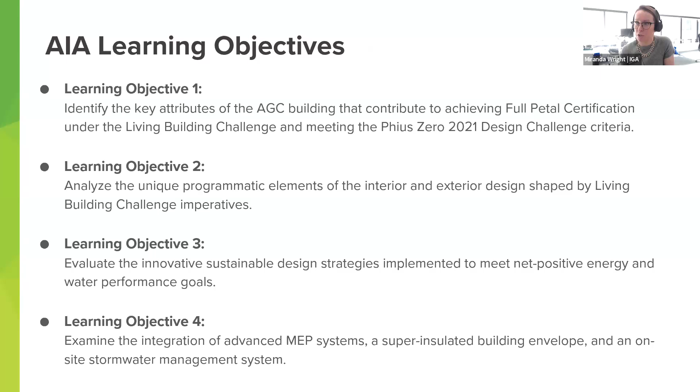And now on to the main event. We have a great lineup of the project team for today's program, starting with Angel Valtierra, an associate at SMNGA Ltd. He was the project manager and project architect for AGC. He handled the day-to-day coordination while overseeing the construction documents and administration for the project.

Next is Todd Niemiec, a principal for SMNG. Todd served as project architect and team lead for AGC with a focus on building programming, planning, code, and zoning compliance responsibilities. Then we have Len Sciarra, principal for FARR Associates. Len served as associate architect leading sustainability activities and detailing of the exterior building envelope.

And last but not least is Sachin Anand, principal with DBHMS. Sachin served as the lead building systems engineer for AGC with a focus on building performance modeling, system design, and thermal comfort design. Now I'm going to pass it over to our speakers to get started.

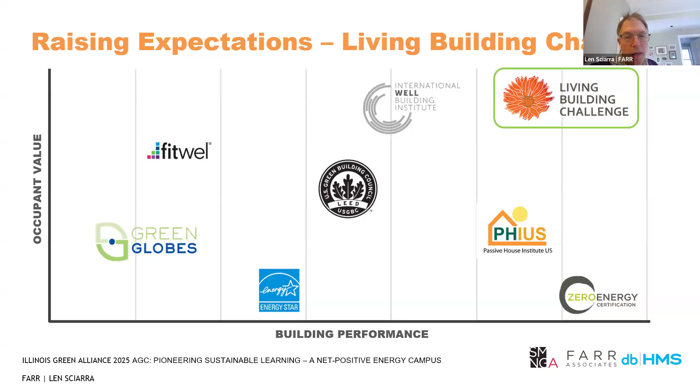And we're like, can we do it? We're like, well, we think we can. And we had the land, so that made it a little easier. And there was some ComEd community grant to help with some of the PVs on that. So kind of all the pieces fell together. And we put a stake in the ground and said living building. And we're well on our way. We have submitted, so we'll see on that. Next slide.

All right. So Todd talked a lot about community engagement and front end work and the Cultivate Collective Academy for Global Citizenship. They've got a lot of partners. It's a very complicated capital stack. So Aaron Carbonari helped put that together. There was a lot of community engagement on the front end that helped because as part of living building, there's a whole chunk of equity and inclusion that you need to document and you need to engage in the process. And so luckily, at AGC that was all what they do. They're into it. And so it was sort of easy to go through all that.

On the construction side, it was a typical design bid build. Todd's team had the construction of the building, but then there was a kitchen consultant and furniture consultants and permits and graphics was a different group of people. So there was a lot of other people. So as the sustainability integrator, we had to get information from all these people. And then of course, power and the subcontractors. So there's just a lot of people involved and there was a lot of information flowing back and forth.

And I think part of this presentation is about what we would have done differently. We would have had a way better collaborative portal for information, because there's so much information that has to flow back and forth between so many people. And we were doing it via email, which is fine, but having a more comprehensive collaborative portal where we could have exchanged information would have been super helpful. Next slide. I think it's worth mentioning that this was built during the pandemic.

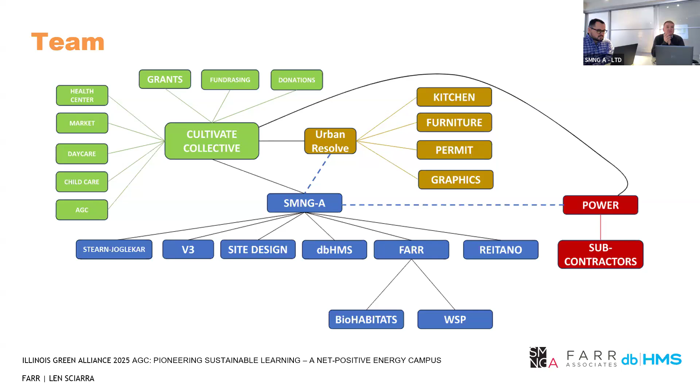So we did have challenges with being in person and communication, but also with construction and long lead items and supply chain disruptions. So it was very critical at the very beginning to have everybody at the table, not bring people on as we went. We needed the benefit of everybody's perspective on things, including the contractor. So the contract here was pre-construction services leading to a GMP, and all the subs were bid out competitively. So it was a qualifications-based selection at the front end. If we didn't have the GC at the front, it would not have made this easy, or I'm not sure if it would have worked at all. Right. Yeah, good point. Next slide.

All right, so Todd alluded a little bit to the site, or Angel, do you want to talk about the site? Yeah, for the site, as Todd mentioned, it's in Chicago, Illinois, on the southwest side near Midway. So we're just north of Midway, in the flight path, surrounded by residential. As mentioned, it was the former LeClaire Courts residences, but those were all torn down in the 2000s, and the site had remained vacant. We're not going to go through every petal and every imperative, as there's 7 petals, 20 imperatives, but we just want to highlight a few things about the Place petal.

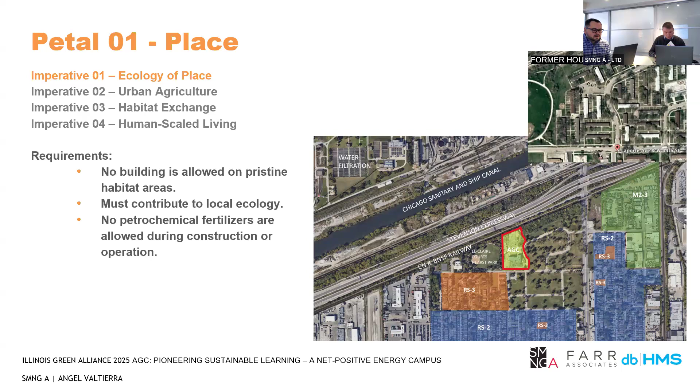As Len mentioned, we do need an open site to be able to house a few things that support the program and the Living Building Challenge in terms of supporting its users and making a better environment for everybody. So zooming in on the site itself, it automatically lends itself to the Place petal because it's not a greenfield site. So we're kind of rejuvenating the site with an urban farm that can support the school and the community. We have the PV to the right side of the page. We couldn't fit all of the PV on the roof, so we had the land and the space to put the PV. As we're going clockwise, the training hub environmental center, that's part of phase 2 programming.

And then just south of that, there's the community plaza next to the community hall. As Todd mentioned, the Esperanza Health Center is on the southwest corner, or bottom left corner for everybody. And then, other programming needs, we have covered bike parking, which is unique to the project, but that also lent us another surface for the PV.

So as Todd mentioned, the curriculum requires them to be outside 30% of the day. So that lent a helpful hand in terms of meeting the other imperatives, like habitat exchange. They're doing a lot of community service outside of their site. They're giving back to the earth. And then human scale, we're not imposing on any other surrounding sites. So that helped us as well. So location was a key factor for achieving this petal.

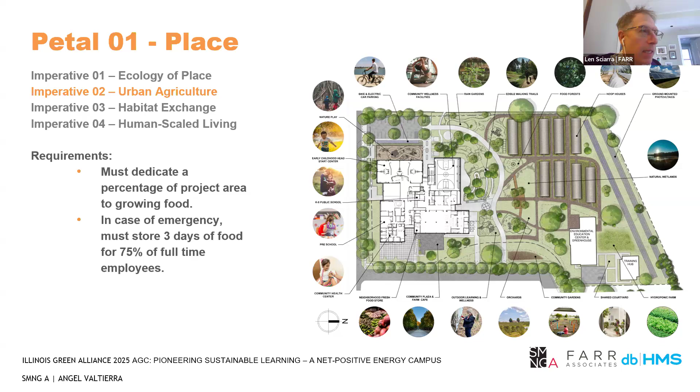So Sachin, I'm not going to steal your thunder. Okay. Oh, wasn't there another place petal? Okay, well, we're going into water now. No, I skipped those ones. Got it. All right, cool. So Len, you want to team up with me on this water petal so we can talk through this real quick? Yeah. Love it, because that little Department of Buildings is mine.

Yes, it is. And really, what we want to talk about here, and you heard Len mention it earlier, is some of the lessons learned. What went better than expected, and what was a challenge. We're not trying to walk you through how to design an LBC building. A lot of folks listening today probably already know that. We're trying to share our lessons learned, and on the water side, as you know, we need to be at net positive water, and we went through an entire process, and Len really spearheaded that. So I'll let him chime in here, in terms of working that through with the Department of Buildings.

So obviously the first stumbling block is that they won't let us use the water for drinking. And they were even really nervous about the toilets. I'm sure everyone has heard the story about, oh, what if they drink water out of the toilets? You got way bigger issues if you're drinking out of the toilets. But we got through that, and we got through who's going to inspect the system, because it's kind of a state thing versus a city thing, and they were all hands off. But eventually we got everyone together. This was also during the pandemic, so we couldn't meet with anybody, and it was brutal getting a hold of anybody in the city.

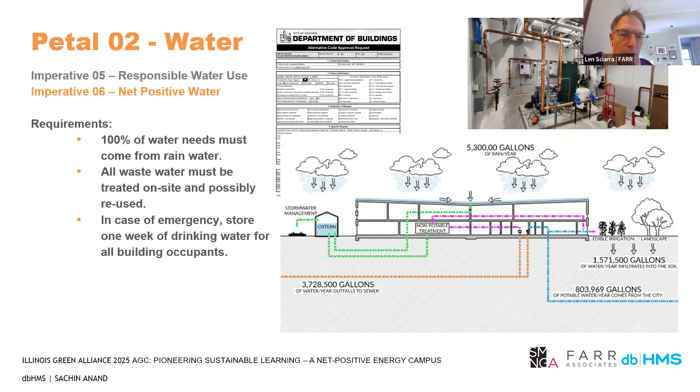And then here's just a schematic. The one thing I would mention here, just in passing, is that if you haven't done a rainwater harvesting or a stormwater harvesting system, it's not very complicated. It looks complicated on this. We've done it several times on projects, and these days you have folks who will provide you a skid-mounted system. Don't try to reinvent the wheel. Talk with one of those providers. They will work with you.

And like Len said, the key is how it integrates with the plumbing and the controls and the electrical and the energy piece of it. I think that's the place where you need to pay attention, rather than the inner workings of this system. That would be my advice to folks who want to incorporate a rainwater harvesting system on their project. And no standing water.

You've got to be recirculating your water. So with the day tank, you've got to be recirculating the water. The cistern, you've got to be agitating the water. The city really doesn't like water just sitting around. It's always got to be moving. So there's a lot of, oh yeah, we need another pump to circulate the water, and a float switch to tell when we need to circulate. Yeah, that's the lesson here. Circulate the water. Next.

I think one thing too, and maybe you can speak more, is the advocating to the state, how we had to go to the state level for this to get passed. Well, again, this is a city. The city was like, rainwater, that is not our gig. They don't want to touch this. The City of Chicago doesn't want to touch rainwater. They're perfectly happy to push it off to the state.

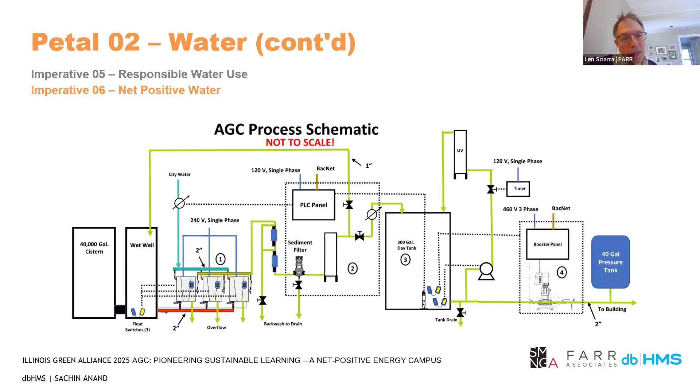And of course, there's one guy in the state. But I have a cell phone number. So eventually we got them together, and the city was happy. The state was happy, and we're flushing the toilets. Just don't drink the water from the toilets.

The other big piece about the water, at least in the living building, is that because we have a combined sewer overflow, we were able to use the fact that we have a superior stormwater management system to reduce our release into the combined sewer. So within this context of a living building in Chicago with a combined sewer, we were able to combine the stormwater and the potable water, because the ultimate outflow of the system is the combined sewer.

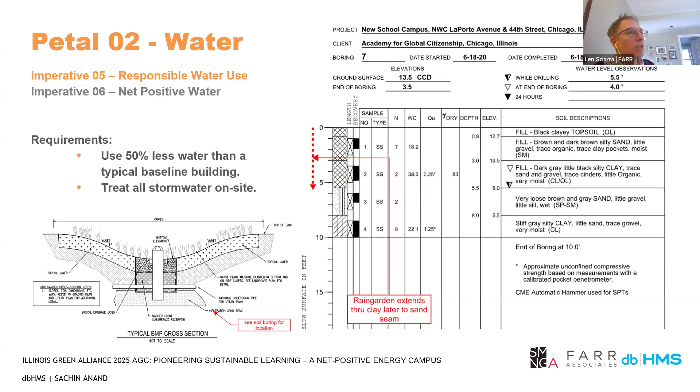And we were very fortunate. One, we had a lot of land, and two, we had a really nice sand seam. So once we punched into the sand seam, we were able to absorb 100% of all the stormwater. It was a lucky accident, and it allowed us to make the net zero water thing go, because we are releasing water into the sewer. We don't have a black water system. There are some exceptions there. So it's net zero water, but it's net zero water when you count the stormwater.

But it's really about keeping an eye on this. Like Len said a few minutes ago, we didn't consider the freeze protection heater for the stormwater cistern, and we had to add that back later towards the end when we discovered that. Those are all things which can trip you up, and it's really important to have that communication with the team.

The other thing, which is a lesson learned and also important for these projects, is that you have to pay attention when you're getting submittals for equipment which uses energy, because very often the system may perform, it may move the same amount of air, but it may be of a different horsepower. So the devil lies in the details, and you're constantly adjusting your energy model and updating it with the changes, not just during the design process but also during construction, to respond to certain things.

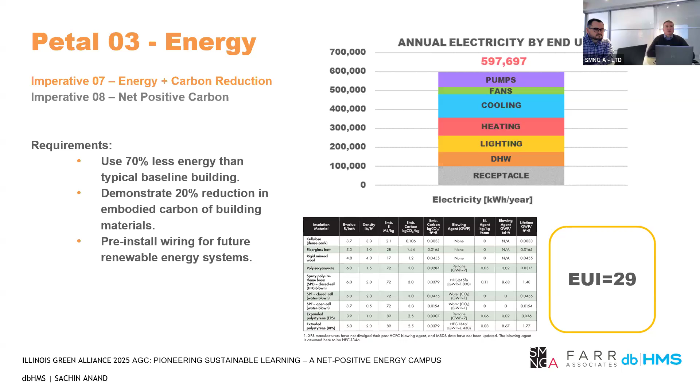So we'll switch to the next slide and start talking about some of those things here. Sachin, I thought I'd just mention also that a lot of this modeling required us to really understand how the user was going to use the building, the hours of use, the intensity of use, and really get everybody on the same page. I know that there are systems that are bigger than plug loads, but it's really important to get a meeting of the minds on how the building's going to be used so that we accommodate those loads and that energy use accordingly.

Correct. Excellent point, Todd. And the other thing is, we had meetings with the users, but also once the building was built, we went back and had meetings with groups of faculty to educate them. Very often, what do we do in our industry? As designers, we design, the constructors build the building, we do some commissioning, and that's great. But then we turn over the keys to the users, walk away, and hope that the building's going to perform. If you really want to have a sustainable building, you have to maintain that engagement.

So moving on here, the most important piece of the energy efficiency for this building is really its building envelope. Now we've gone through two really cold winters, and we know how the building performs. Last year, when we had the really cold spell with almost single-digit temperatures, the building lost power for 48 hours because ComEd's transformer had a problem, and the temperature never dropped below the low 60s in the building. So that tells you a lot about what a really good building envelope can do, and it is key to maintaining the energy efficiency. Then supporting that building envelope are some of the systems we have.

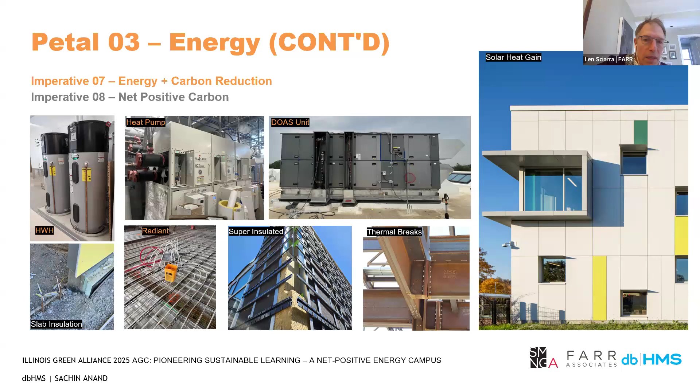And I think insulation wise, Power did a great job. I mean, Steve Black, and he was on it. And next slide. We had a very robust air barrier. It could take a lot of abuse. I have some pictures of this stuff banged up and they could seal it.

So we're pretty good. We probably could have spent a little bit more time analyzing the wall R value, and maybe we went a little bit overboard, but we weren't sure because we knew we had to hit 0. So we have a pretty involved 8 inches of insulation, which involved the Cascadia clip and then another piece of metal. And if we had maybe gone to 6 inches, we could have just used the Cascadia clip and saved us a little bit of stress. But they needed it for the subframing to get it all square.

The other piece on this, on the energy petal, just so you know, that's where LBC puts all the embodied carbon. So in addition to all this, we did an embodied carbon study against the baseline. There are some offsets to offset the embodied carbon, and that was pretty straightforward. But the data for embodied carbon is all over the place. We used a little bit of Athena, we used a little bit of the people from Washington Carbon Leadership Forum.

So we kind of mushed it together. It's kind of like LEED. You just sort of do what you can because the information is not 100% there. But we didn't use anything like Tally where we sort of took the building. It was a very manual process of looking at the elevations, doing square footage takeoffs, and I've never met a spreadsheet that I didn't love. So it worked out spreadsheet wise.

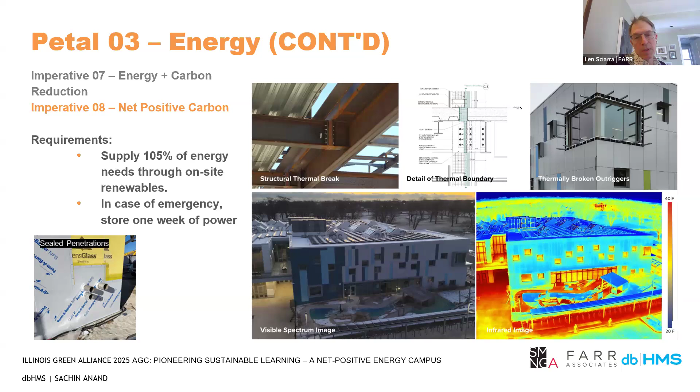And then the ventilation is decoupled from the heating and cooling. So what that does is that makes the ductwork smaller, and we use the water to deliver heating and cooling into the space, which is more efficient. And the other thing I want to point out is the building is all electric, no fossil fuels, and we do not have any backup electric or any other kind of backup for the geothermal. So we're 100% heating and cooling on the geothermal.

So on a day like today, if that parking lot warms up because the sun's hitting it, that water in those tubes could be 70, 80 degrees, and we could inject that into the geothermal loop, which would improve the efficiency of the heat pump. So that's kind of part of it. The other thing the building has is a PV system, which is north of 0.5 megawatt. Part of it is ground mounted, part of it is roof mounted, and then we have a battery energy storage system.

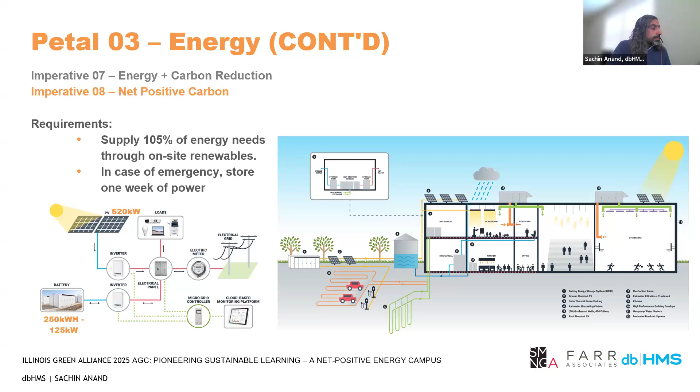Okay, so now we jump into the interiors, and a couple lessons here are daylighting is really hard, and views are really hard to balance with the envelope, right? As Todd knows, the original building was a long, skinny building, tons of daylight, tons of surface area, and it wasn't going to meet our energy goal. If you notice, it's a very compact shape, yet deep floor plates.

The materials, pretty straightforward. CDPH, tons of materials available, not that difficult for people to comply with. Just have it in your specs. And then AGC is very involved, so we had an operations plan, green cleaning chemicals, pretty straightforward stuff. Next slide. Len, I want to go back and talk a little bit about the daylighting.

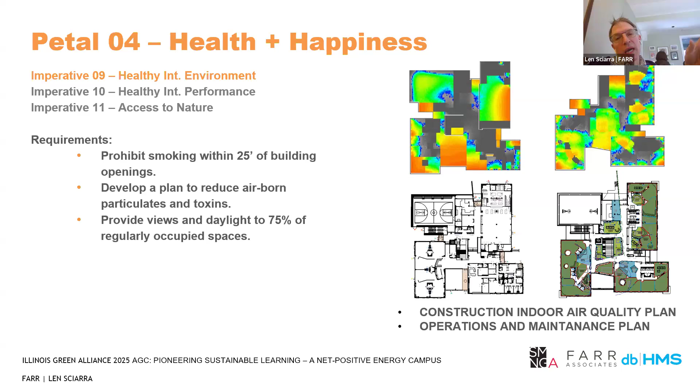So the window to wall ratios are measured and placed appropriately based on the modeling and the architectural design, and that's really key to it. This notion that you have to have 50 or 70% window to wall ratio to make the building open and have good daylight is not necessarily true. Right. There is a lot of transparency, and we have some more photos of the inside looking out in the next 2 slides.

So the other piece to Living Building is to have sort of a monitoring system or testing. And very early on, we said, no, there's no way we can test the building, because guaranteed, once the people use it, all the formaldehyde levels and the VOCs are going to just go up because of all the clothing and the perfume. So we decided to put in a RESET system. However, we didn't hire the RESET person early enough, and we have to add some sensors.

So if you're doing a RESET system, you've got to get them super early, because there's all these parameters about how big a room can be versus the sensor. So basically it's just number of sensors. And we came up short because we didn't engage those guys. Like the battery guy, we didn't engage, in this case it's the girl, but we didn't engage the RESET person early enough. And we're chasing our tail on that. So get people involved early, because this is really complicated.

But other than that, the sensors we do have are measuring, they're working, they're integrated with the building management system. And sometimes it's providing too much information. So Paul's like, whoa, what's going on? And it's a school, right? It does exactly what you would expect. In the morning, the VOCs go way up, right? And then the ventilation system starts filtering and things drop down. So it's doing exactly what it should. Next slide.

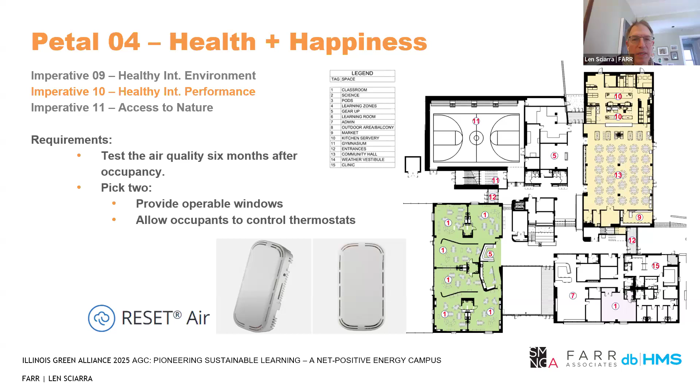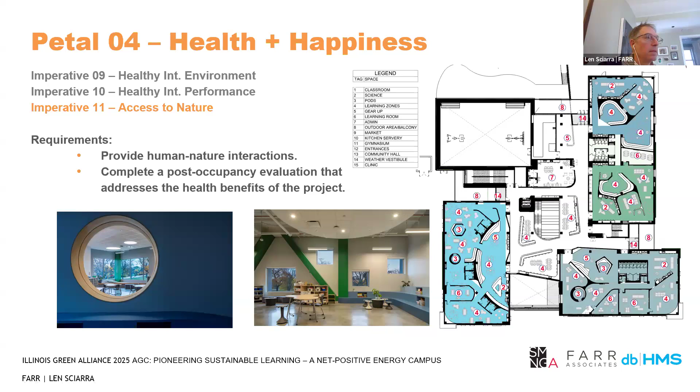All right, so within the LBC, there's the dreaded materials petal, and I'm going to say dreaded because it is the dreaded materials petal. Luckily, you can skip Imperative 12 and go right to 13, 14, 15, and 16. So in the materials petal, as everyone on the call knows, it's the Red List, right? And there's the pesky chemicals, and they're everywhere. And what would I do different? Boy, a lot more research ahead of time, and a lot more contractor training.

Power was on board with this. I mean, they knew what they were getting into. It's not like they were blindsided, but I think that they didn't know the level of detail that they needed to get to, and particularly the level of detail from the manufacturer, right? This is the key. So I'll talk to Power. Power's going to talk to AMS. AMS is going to talk to Bornquist, and Bornquist is going to talk to Kinetics.

Okay, the person we need to talk to is the guy at Kinetics. I've got to talk to some tech at Kinetics, who's working in the factory, or some engineer, right? But just to get that email chain, that's like 7 emails to find the person at Kinetics that can tell me about these isolation bases. They keep the pumps from shaking the building apart. And so I don't think anyone realized that we had to go that far down the food chain, or I guess everyone thought maybe AMS will have this. But going down that food chain was super stressful, because no one was really used to it.

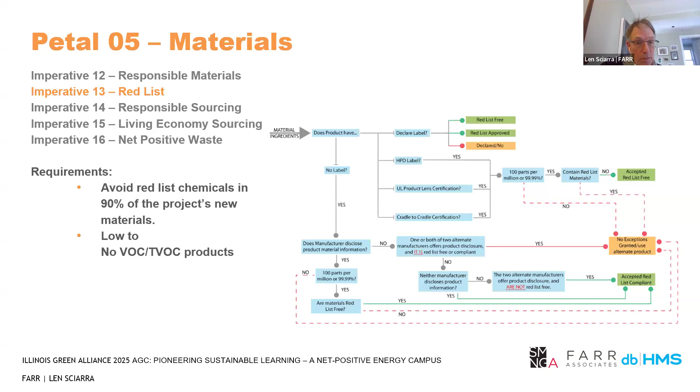So the biggest thing on the responsible sourcing was living building products. There's just not a lot on the market. So we sort of had to make it work, because you have to have 3. And then the wood. So FSC wood, easy. Kind of make a choice, FSC wood from Oregon or non-FSC wood from Wisconsin because it's closer. And then all the furniture. And because of the complicated procurement path, furniture was bought by a separate vendor and they were European.

And so not all wood in the world is created equal. And so you really just have to get familiar that there's low risk wood and then there's FSC wood, and that low risk wood is good, but it takes some work. And so all the playground equipment is invasive species, but we had to call a guy in Wisconsin. I had to get all this information about how he actually selectively harvests the black locust, and document all this. And had I known, I would have driven up to Wisconsin and taken a bunch of photographs of him harvesting the trees. But at the time I didn't know.

The same with the furniture: there's a European furniture standard that we didn't know about that makes it low risk. So our wood is blended between legit FSC wood and what they consider low risk wood. So you have more wood in a building than you think you do, even though the building is mostly steel. All right, next slide.

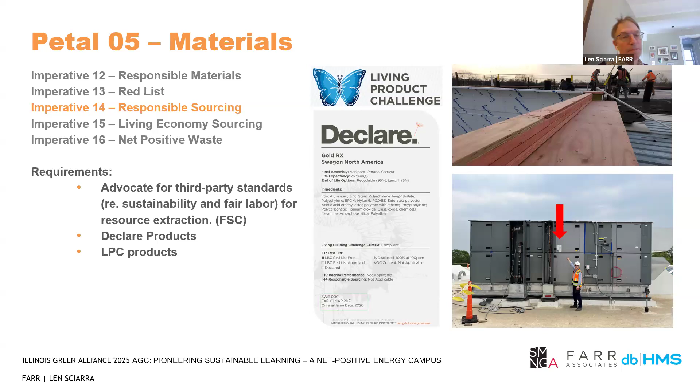This was pretty straightforward. Where's stuff from? This was super easy. There's no issues; I forget the number, but we're well within the 20%, 30%, and 25% for regional. But we're in Chicago, so it's super easy, right? I think if we were in Guam or Maine, it might be a little difficult.

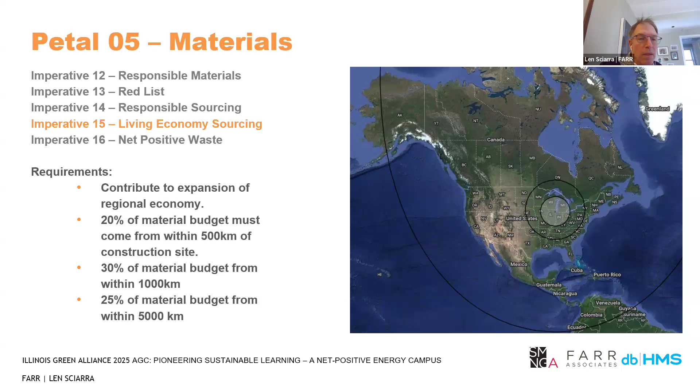Next. And then the waste, the net positive waste was pretty straightforward. Power knows how to do the waste management. We laid that out early. They had the rules. They had the dumpsters. You can see the multiple dumpsters out there. This was pretty straightforward. I have to say, recycling XPS and EPS is not the easiest in the world. So that was a little bit of a what are we going to do with this? So that was a kind of a, had I known, we would have been more dogmatic with the XPS and the polyiso.

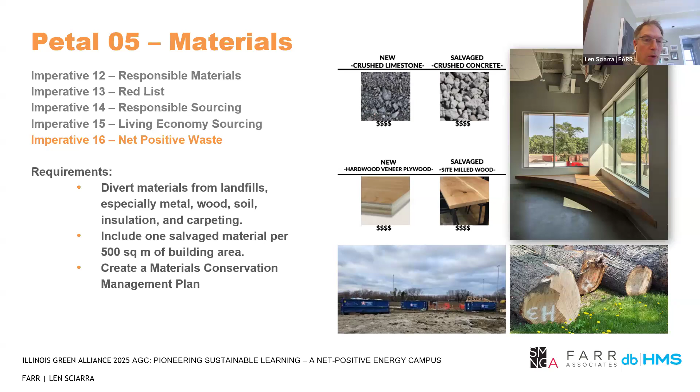The last 2 petals are equity, and a lot of this is about... Well, Todd, you can talk about universal access. You wrote the letter. Hey, I'll be quick. I know there's probably questions.

Universal design principles were incorporated into the design to the greatest extent possible to maximize usage by different age groups, regardless of physical abilities. We incorporated the first gender-neutral toilets into this facility for students and staff, age-appropriate teaching kitchens within each learning village that also had full access for people with disabilities, uniform work surfaces where we could get a constant, accessible counter that also worked for able-bodied folks. We always looked for those opportunities, as well as seating areas incorporating companion seating throughout the building.

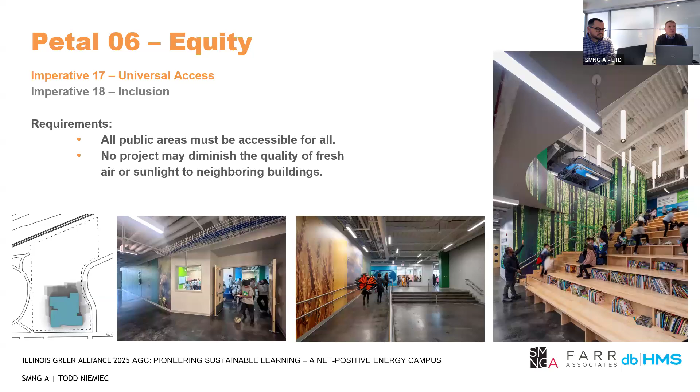Imperative 18, inclusion. As part of the land acquisition from CHA, AGC signed an MOU that ensured that current and past community members were brought into the planning process and provided opportunity in the workplace. So it created 26% minority and 5% women-owned business participation on the aggregate, as well as 50% Chicago resident participation and Section 3 resident hires as well. The workforce development was managed by consultants that assisted the public outreach and facilitated local hiring meetings and outreach to exceed the aspirational goals and requirements.

So the lesson learned here is if you want to pursue this, you need to be really on the contracts, because a lot of this Power and the consultant managed a lot of these workforce contracts. And it's just a lot. It's something way outside most architecture realms, and it's super important. And you can't do it unless you do it up front, because you can't catch this stuff at the end. This is all early groundwork that you have to do to achieve this equity and inclusion petal. So credit to Urban Resolve for helping shepherd that all through.

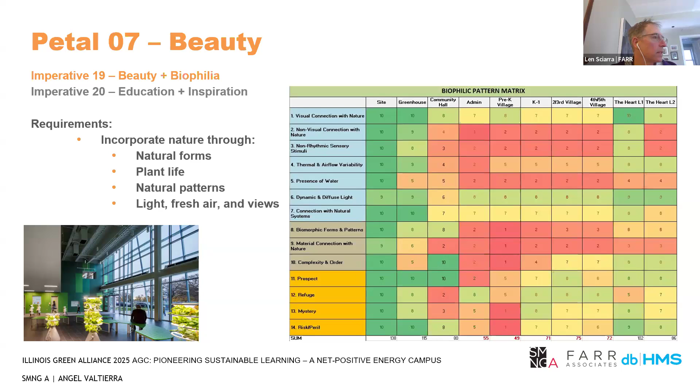And next slide, we're almost done for questions. So last slide: one principle I think about with LBC is transparency. So education and inspiration, just like today, we're giving the talk. We've done this talk to the teachers, the students. We're continuing to do tours. The school provides that mission as well. They're on board. It's a testament to not only LBC, but everyone has bought into this goal. There's a lot of buy-in from the ownership and the contractor, and this team as well. And then we have the graphics to support that, so we're continuing to get that messaging out, and that message is displayed throughout the school in the graphics.

Anything else you want to add? Well, I think we could have engaged the graphics person earlier too. We're architects, so we speak this all the time, and graphics people have to interview you. You're trying to translate stuff like a geothermal heat pump into something people can understand. There's a lot of back and forth so you can translate that into a graphic that can be used for kindergartners as well as eighth graders as well as adults. You think graphics happen at the end, but you should probably integrate it earlier so you can have those conversations.

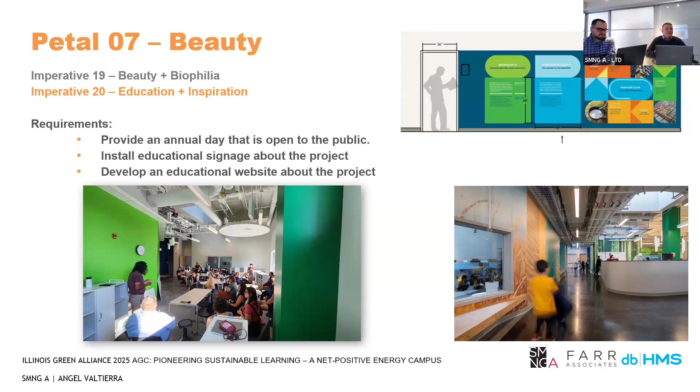Okay, questions. I guess Miranda, are you the question keeper? Yes. Awesome. Thank you all so much. I am going to start at the top in the Q&A function.

Someone asked, please describe how important was aggressively targeting the embodied carbon of the building and those goals? It's only important because you have to pay for it, right? You have to pay for a carbon offset for your embodied carbon. And I'm going to say that carbon is a lot cheaper than it probably should be. So that's not a big stick, right? I mean, we want to reduce embodied carbon because it's the right thing to do, not because we're buying offsets. So it was important, but it wasn't the prime driver on this.

I mean, we did look at the insulation, and we used mineral wool on purpose because it doesn't have the refrigerants. We would have loved to use it on the roof, but polyiso is sort of the go-to product, and we did have a budget, so we had to make some choices. But yeah, I don't think it was a prime driver. Where did your embodied carbon offsets primarily come from? Oh, Green-e. I have it up. I can tell you.

I missed the source of drinking water. Where is it obtained? Lake Michigan. The city wouldn't let us use the drinking water, even though we have a filtration system that brings it to drinking level quality per the state. They wouldn't let us use it in the faucets, so it comes from Lake Michigan. We are piped for it though, so we're ready, and we're piped to send it to the farm. We're also ready there. There's a pipe with a little teeny gap, so it's like a 10-minute operation to put a piece of pipe in once we get approvals.